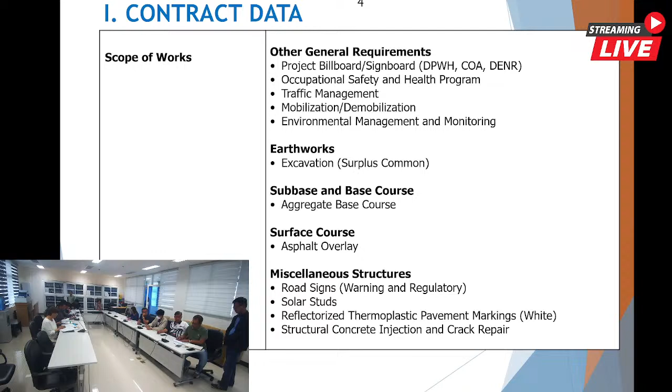For contract duration: net working days, we have 90 calendar days; predetermined unworkable days, 8 days; and Sundays and holidays, 26 calendar days, with a total of 124 calendar days. The required PCAB license size range is at least Medium A. SLCC bidders shall have completed a contract on the major category of work with a construction cost of at least 50% of the ABC of the contract to be bid, which is equivalent to 32,091,557 pesos and 50 centavos.

For the category of work: RCA, roads, construction, asphalt. For similar categories of work, we have RRA, roads, rehabilitation, asphalt.

Work experience requirements for key personnel: for project manager, at least 5 minimum years of total work experience in position and 3 minimum years of similar experience in position. For project engineer, 5 minimum years of total work experience and 3 minimum years of similar experience in position. For materials engineer, he must be an accredited Materials Engineer 1. For quantity engineer or surveyor, at least 3 minimum years of total work experience in position and 2 minimum years of similar experience in position. For foreman, 5 minimum years of total work experience in position and 3 minimum years of similar experience in position. Safety officer accredited by the DOLE, and pollution control officer must have a certificate of training issued by an EMB recognized organization.

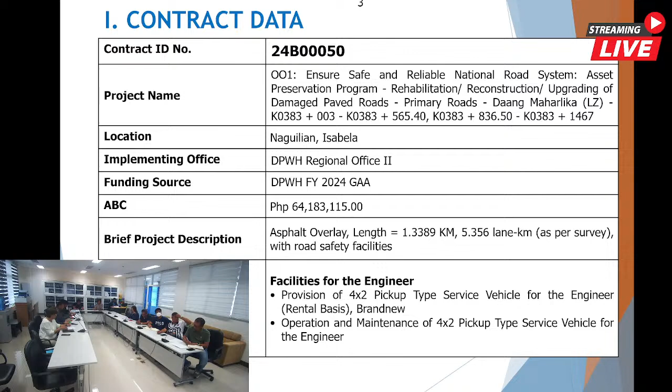Thank you, Sir Bernie. We now go to the next project, 24B00062, to be presented to us by Rosa Lucera.

Good morning, Madam Chair, and to everyone. For contract ID number 24B00062, the project name is Ensure Safe and Reliable National Road System Network Development Program, Construction of Bypass and Diversion Roads, Tuguegarao-Solana Diversion Road, Tuguegarao-Solana Bridge and Approaches, Phase 3, Package 2, Cagayan. The location is in Tuguegarao City, Cagayan. The implementing office is DPWH Regional Office 2.

The funding source is DPWH FY 2024 GAA with an ABC of 270,200,000 pesos. For the brief project description, it is the construction of bridge and approaches, piers 6, concreting of 2 bored piles, Pier 9 to Pier 10 and Pier 13, concreting of bored piles to coping.

Pier 11, 12, and 15, completion. Pier 14, concreting of 2 bored piles and tie beam, and partial installation of rebars for column. Pier 17, concreting of 1 bored pile, steel platform, 3 sets to be reinstalled.

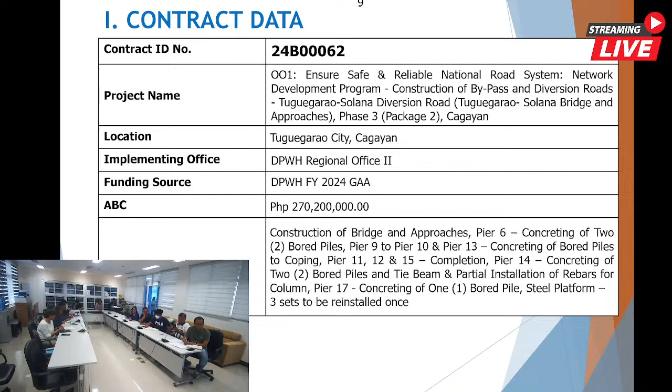For the scope of work, for the other general requirements, we have project billboard, signboard, DPWH, COA, DENR, occupational safety and health programs, traffic management, mobilization, demobilization, and environmental management and monitoring.

For road bridge construction, we have steel H-piles, furnished and driven, concrete piles cast in drilled holes 2.4 meter diameter, permanent casing, 16 mm thick, 2.4 meter diameter, pile integrity testing, crosshole sonic, high-strain dynamic testing, PDA, structural steel, furnished

erected, grade 36, reinforcing steel grade 40 and 60 bridge, structural concrete 27.58 megapascal class A, 28 days for bridge, bearing devices, steel bearing. For contract duration, we have for net working days, we have 294 calendar days, predetermined unworkable days,

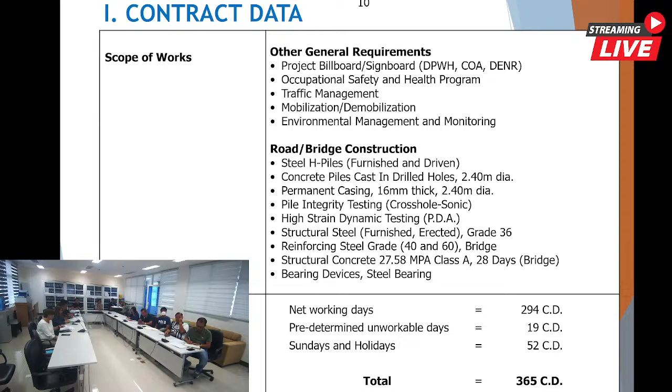19, Sundays and holidays, 52, with a total of 365 calendar days. For the PCAB license, required PCAB license, size range of at least medium B.

For SLCC, bidders shall have completed a contract on major category of works with a construction cost of at least 50% of the ABC of the contract to be bid, which is 135,100,000 pesos. For major category of work, BCCCP, bridges, construction, concrete, superstructure with cast-in-place piles.

For similar categories of work, BRHCCP, bridges, rehabilitation, concrete, superstructure with cast-in-place piles. BRTCCP, bridges, retrofitting, concrete, superstructure with cast-in-place piles. BCP, bridges, construction with bored piles. BRP, bridges, rehabilitation with bored piles. BRC, bridges, rehabilitation, concrete. BCC, bridges, construction, concrete. BRR, bridges, rehabilitation, retrofitting.

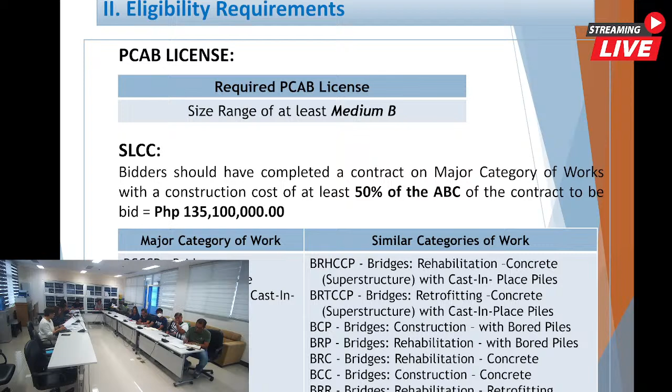For the project requirements for work experience requirements for the key personnel, please refer to the bid data sheet of the bid document. For the minimum major equipment requirement, likewise, please refer to the bid data sheet of the bidding document. That's all, Madam Chair, for contract ID number 24B00062.

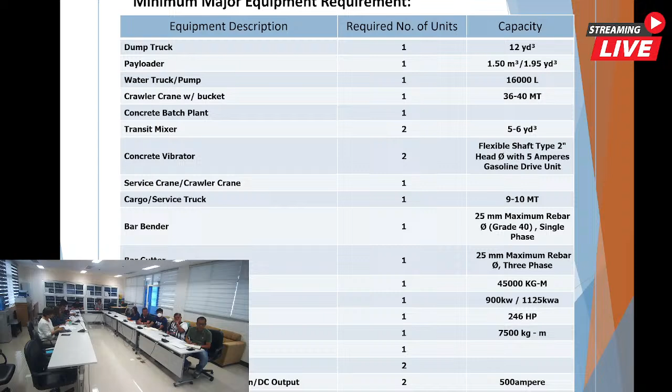Thank you, Ma'am Rose. For contract ID 24B00069, yes. Good morning to everyone. For contract ID number

24B00069, project name is 001, Ensure Safe and Reliable National Road System, Network Development Program, Road Widening, Primary Roads, Junction Logac-Magapit Road, at kilometer 708 plus 50 to kilometer 708 plus 346.6. It's located in Lallo, Cagayan and to be implemented by DPWH Regional Office Number 2.

Funding source is the 2024 GAA. It has an ABC of 13,198,937 pesos and 50 centavos. For the brief description of the project, that entails road widening with a length of 0.297 kilometers or 0.593 lane kilometer as per survey, with 7-day concrete and road safety facilities.

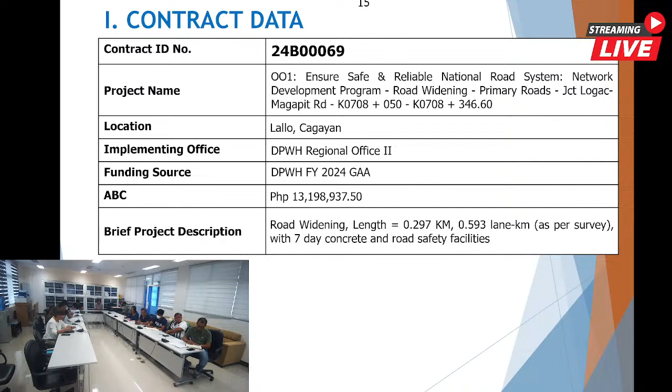Under the scope of work, we have other general requirements. There's project billboard, signboard for DPWH, COA, and DENR, occupational safety and health program, traffic management, mobilization, demobilization, removal and relocation of utilities, and environmental management and monitoring.

Under earthworks, we have removal of small trees, 160 mm diameter to 500 mm diameter, removal of structures and obstruction, 0.23 meter thick PCCP concrete. We have also surface canal excavation for structures, foundation fill, embankment from roadway or structure excavation, and subgrade preparation.

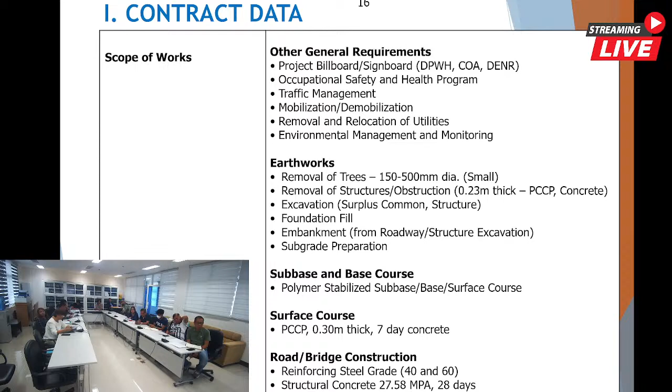For subbase and base course, we have polymer stabilized subbase, base surface course. Under surface course, we have PCCP 0.30 meter thick, 7-day concrete. For road and bridge construction, we have reinforcing steel grade 40 and 60, structural concrete with 27.58 megapascals, 28 days, and paint.

Under the miscellaneous structures, we have metal guardrail, metal beam including post, single W-beam, metal beam end piece, bullnose, trees furnishing and transplanting, reflectorized thermoplastic pavement markings, white, and removal of existing reflectorized thermoplastic pavement markings.

The contract duration is 103 calendar days, inclusive of predetermined unworkable days of 7 days and Sundays and holidays of 17 calendar days.

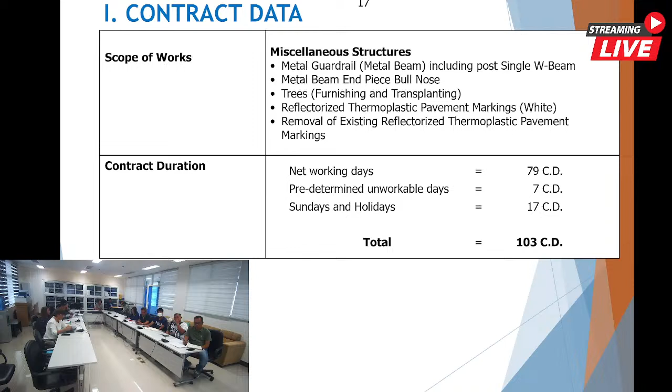For the eligibility requirements, the PCAB license: the required PCAB license is size range of at least small B.

For the SLCC, bidder should have completed a contract on major category of works with a construction cost of at least 50% of the ABC of the contract to be bid, which is equal to 6,599,468 pesos and 75 centavos.

Under the project requirements for the work experience requirements for the key personnel, please refer to the bid data sheet of the bidding document, as well as the minimum major equipment requirements. That's all.

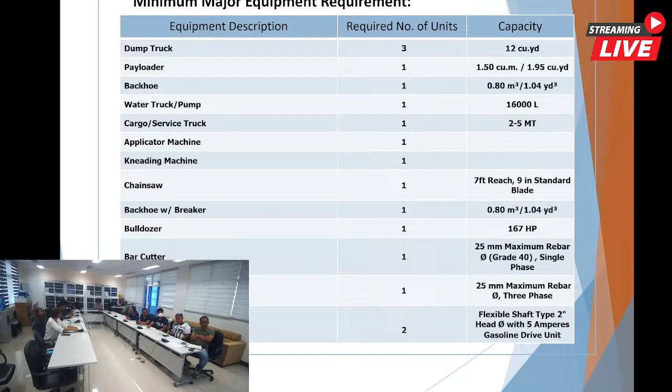And for the last contract ID 24B00070, it should be presented to us by Sir Bella.

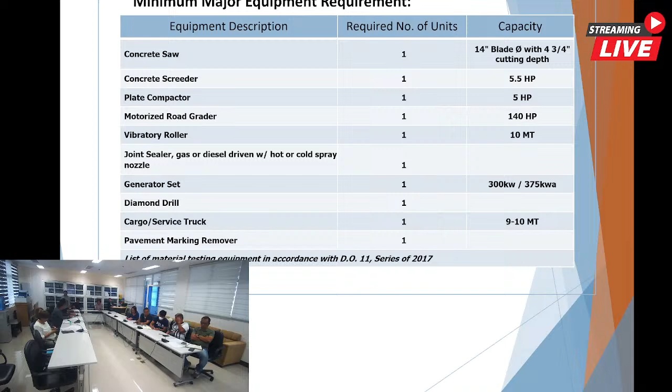Thank you, Madam Chair. For contract ID 24B00070, project name is ensure safe and reliable national road system, network development program, road widening tertiary road, Naguilian-San Mariano road, K0384 plus minus 155, K0385 plus 780.

Location is Naguilian, Isabela. Implementing office is DPWH Regional Office 2, funding source is DPWH fiscal year 2024. ABC is 90,244,053 pesos and 56 centavos.

For the description of the project for widening, length is equal to 1.8874 kilometer, 3.7748 lane-kilometer as per survey, with 14-day concrete and road safety.

For the scope of works, facilities for the engineer, provision, rental basis, operation and maintenance of combined office, laboratory and living quarters building for the engineer, provision of furniture, fixtures and appliances for the field office of the engineer, provision of 4x2 pickup type service vehicle for the engineer rental basis, brand new.

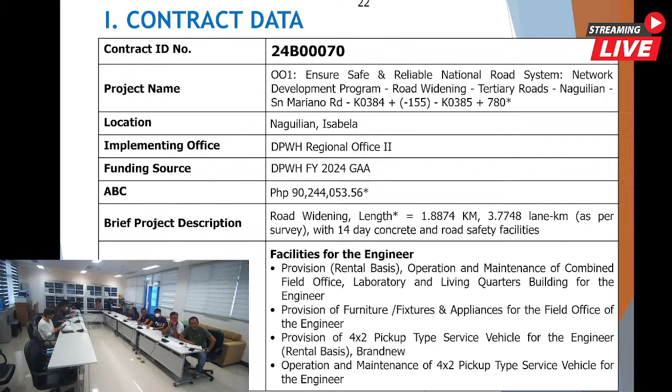Operation and maintenance of 4x2 pickup type service vehicle for the engineer. Other general requirements include project billboard, signboard, DPWH, COA and DENR, occupational safety and health program, traffic management, mobilization, demobilization.

Environmental management and monitoring. For earth works, removal of trees with a diameter of 150 to 900 mm diameter. This is considered small, and above 900 mm diameter considered as large.

Removal of structures or obstruction in 0.15 meter and 0.28 meter PCCP, concrete. Removal of existing guardrails, guardrail posts, and road signs, excavation, surplus common excavation and structural excavation.

Foundation fill and embankment from roadway and from structural excavation and subgrade preparation.

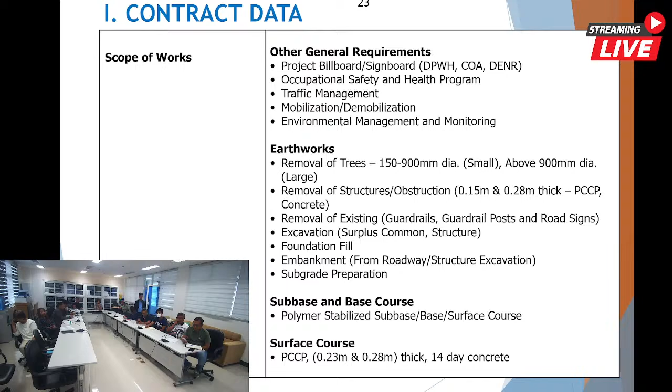For sub-base and base course, we have polymer stabilized sub-base surface course. For surface course, we have the PCCP, 0.23 meter and 0.28 meter, 14-day concrete.

For road bridge construction, with metal railing grade 36 steel, reinforcement steel grade 40 and 60, structural concrete 20.68 megapascal in 14 days, structural concrete 27.58 megapascal for 28 days, and we have lean concrete.

For drainage and slope protection structures, we have metal frames and covers, metal frames and grates. For miscellaneous structures, we have concrete curb cast in place, curb and gutter cast in place, metal guardrail, metal beam, including posts, W beam, metal beam end piece, bull nose.

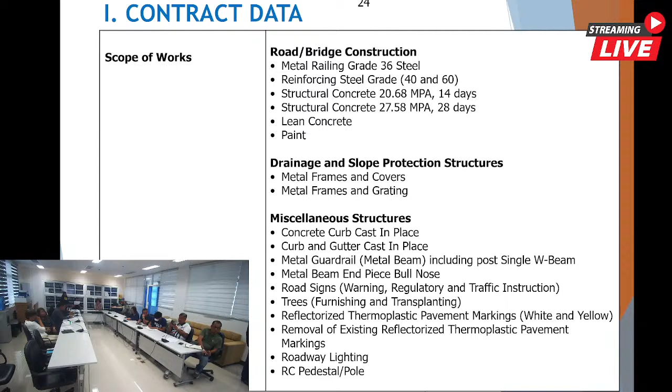Road signs, warning, regulatory and traffic instruction, trees furnishing and transplanting, reflectorized thermoplastic pavement markings, white and yellow, removal of existing reflectorized thermoplastic pavement markings, roadway lighting, and RC pedestal.

The required PCAB license is size range of at least medium A.

For SLCC, bidders should have completed a contract on major category of works with construction costs of at least 50% of the ABC of the contract to be bid. This is equal to 45,152,026 pesos and 28 centavos.

For project requirement and work experience requirements for key personnel: project manager, at least 5 minimum years of total work experience in position, 3 minimum years of similar experience in position. For project engineer, same as project manager. For materials engineer, should be accredited materials engineer 1. For quantity engineer or surveyor, 3 minimum years of total work experience in same position, 2 minimum years of similar experience in same position. For foreman, same as project manager and project lead.

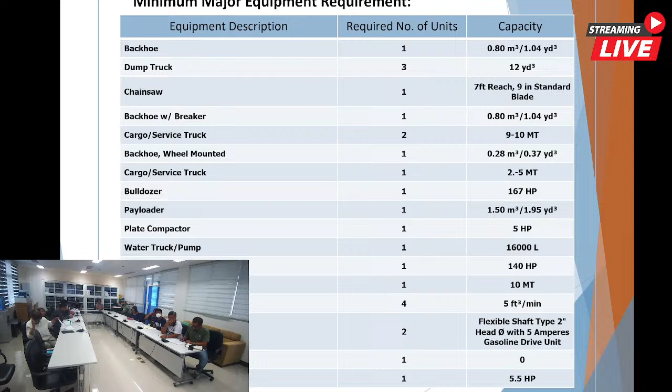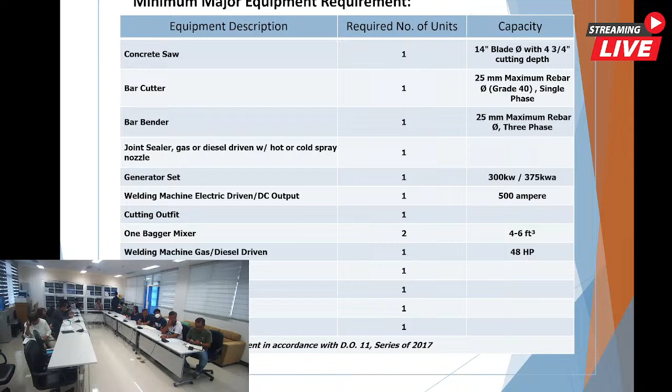For minimum major equipment requirement, please refer to bid data sheet in the bid docs. And also for minimum major equipment, that's all, Madam Chair, for contract ID number 24B00070.

Thank you, sir. We now go to the presentation of the requirements of the bidding documents and the criteria, procedure for the requirements of the bidding documents, and what is to be presented on, to be presented to us by Attorney Mariano.

Thank you, Madam Chair, and good morning, everyone. So for the technical and financial requirements, to be contained in the first envelope is the technical proposal, which shall include the eligibility requirements must be updated in the DPWH Civil Works Application, the bid security, the project requirements, including the organizational chart for the contract to be bid, the list of contractors with personnel to be assigned to the contract with their complete qualification and experience data, list of contractors, construction and laboratory equipment, pledged to the contract supported by proofs of ownership or lease agreements, and the omnibus sworn statement.

As to the registration in the DPWH Civil Works Application, if the bidder is not enrolled in the CWA, the bidder must submit its Class A and Class B documents, excluding the 5 Class A documents covered by the PhilGEPS registration certificate. While if the bidder is enrolled in the CWA, it must update the pertinent documents in the CWA through the contractor profile application in the DPWH website.

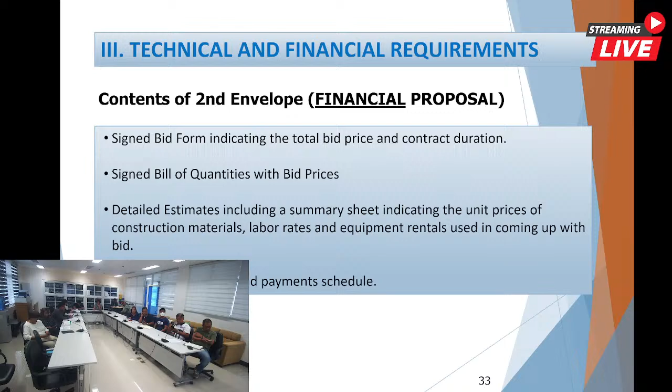So during bid evaluation, the BAC shall evaluate with the assistance of the technical working group, the financial proposal using non-discretionary criteria, including arithmetical corrections for computational errors, and thus determine the correct total calculated bid prices. So the following factors are to be considered in the evaluation of bid prices.

For completeness, if no price is indicated in a required item, it shall be considered non-complying, indicating a zero or a dash shall be considered free to the government. All prices are deemed to include all taxes, and bids not addressing or providing all of the required items in the bidding documents, including where applicable, BOQ, shall be considered non-responsive.

As to arithmetical corrections or discrepancies: bid prices in figures versus words, words prevail. Total price versus unit price per item, unit price prevails. Total price versus actual sum of component items, actual prevails. Unit cost in detailed estimate versus unit cost in BOQ, the latter prevails. So the BAC shall automatically disqualify any total calculated bid price which exceeds the ABC.

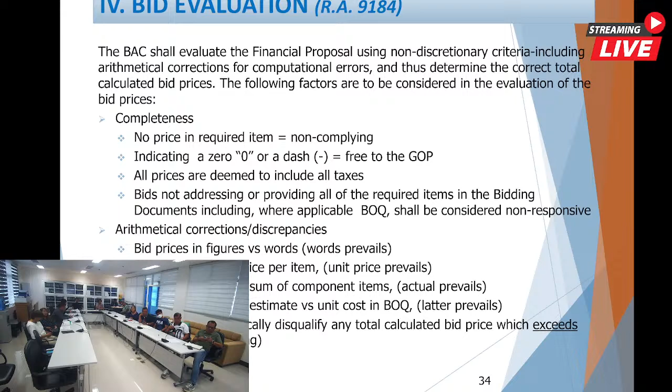So during post-qualification, they will be conducting a verification of the legal requirements, including the licenses, certificates, and permits, and they shall ascertain the fact that the bidder is not included in the blacklist of contractors provided by the DPWH and the GPPB.

There will also be a verification of the technical requirements: the compliance of single largest completed contract similar to the contract being procured, the competence and experience of the key personnel to be assigned to the project, the availability of major equipment units for the project, and per DO number 9 series of 2012, the failure of the prospective bidder to state a complete technical description of the pledged equipment and the specific location, whether owned, leased, or under purchase agreement, shall result in the bidder's automatic post-disqualification for award of contract and forfeiture of its bid security.

It shall also be ascertained during post-qualification the authenticity of the bid security.

Also during post-qualification, the assessment of performance of the bidder in its ongoing project.

So there should be no negative slippage of at least 15% in a single contract, no negative slippage of at least 10% in 2 or more contracts, no substandard quality of work as per contract plans and specifications, no unsatisfactory performance of the contractor's obligations as per contract terms and conditions at the time of inspection, no liquidated damages currently imposed on the contractor, and failure of the contractor to commence repair works on ongoing contracts in a prescribed date after receipt of the procuring entity's notice of defects and deficiencies.

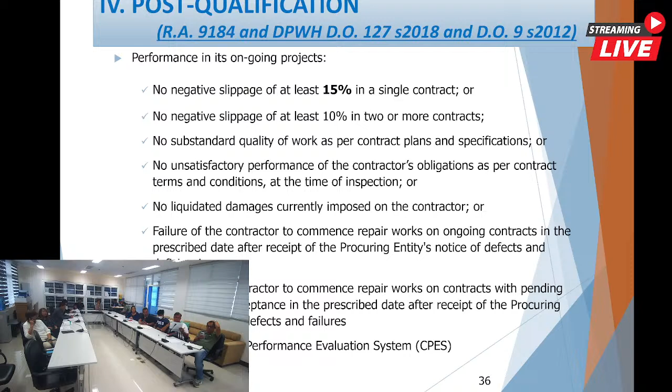So please note that per DO number 9 series of 2012, if a proposed key technical personnel is an employee of the bidder and working on another project at the same time of the bidding, the bidder shall submit a certification that the personnel will be pulled out from the ongoing project once the bidder is awarded the contract, and he or she will be replaced with another person with equal or better qualifications as certified by the head of the implementing office.

The bidder may propose a key technical personnel who is not its employee, provided that the said personnel is required to submit a certification that he or she will work for the bidder if it is awarded the contract under bidding. So this certification shall be included in the first envelope of the sealed bid.

Also to be verified during post-qualification is the set of equipment pledged by the bidder. The bidder should specify in the submitted bid the location of the equipment where they can be inspected, and if any piece of equipment is not in the specified location, then the bidder shall be post-disqualified.

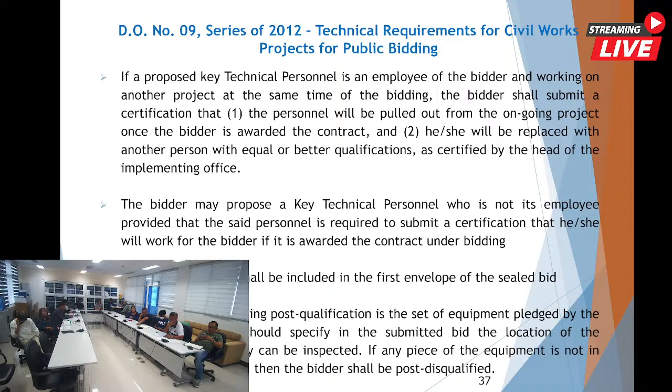So, the deadline of submission of clarification shall be 10 days before the submission of bids. Supplemental bid bulletins, if any, shall be posted in the PhilGEPS and DPWH website.

So the deadline of submission of bids for the 4 projects is on February 29, 2024 until 10 a.m. Manual submission shall be at the Procurement Conference Room, 4th floor, DPWH Regional Office 2, Extension Building 2, Regional Government Center, Carig Sur, Tuguegarao City, Cagayan.

While electronic submission may be done through electronic bid submission _R2 at dpwh.gov.ph. So the required number of copy of the proposal is 1 original copy filed in a sealed envelope.

For the opening of bids, it shall be on February 29, 2024, after the deadline of receipt of bids at the Procurement Conference Room, 4th floor, DPWH Regional Office 2, Extension Building 2, Regional Government Center, Carig Sur, Tuguegarao City, Cagayan.

So bidding documents and plans may be downloaded from the PhilGEPS and DPWH website. That's all, Madam Chair. Thank you, Ma'am Queen.

Mayor Takay, do you have queries or clarifications on the projects and contracts presented? Wala po. May other matters pa?